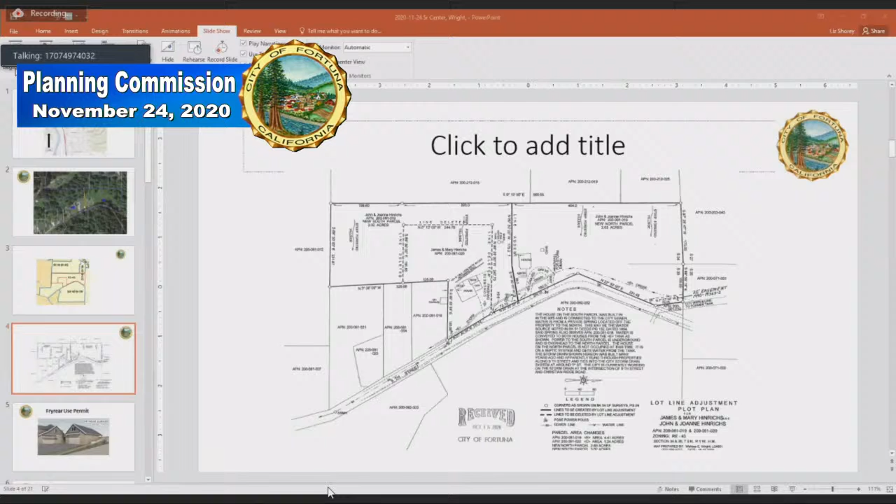That's one of the things that will be remedied. Parcel 2 has a single family residence, and the current side property line will just be straightened out, tidying up and making the two parcels more uniform and standard in shape, rather than having this one wrap around on three sides of the parcel.

The zoning is RE43. This is an image of the zoning map, and this is the site plan.

Here you can see the new line through the middle. The dashed line is the line to be deleted. We've got a house on each side with separate driveways on each side, and there is shared water from a tank.

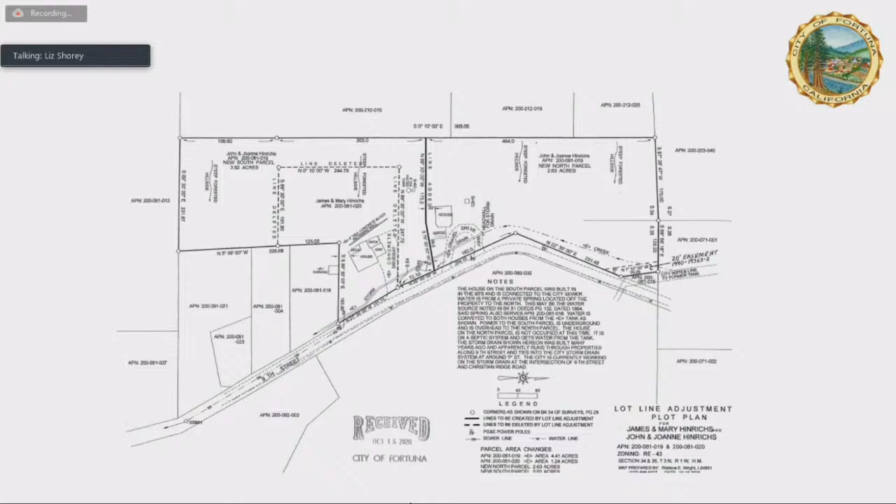Okay, thank you. I have a quick question. I'm looking on the satellite version, and in this picture on my phone, there's a small outbuilding that looks like it's right about where the lot line adjustment goes.

Yeah, let me share that again. There you go. So it's this shed here.

Yeah, it just looked to me like it was very close. It probably will be required to be removed, depending on the size of the shed. If it's smaller than 120 square feet, it does not need a permit, and the setback is reduced to 3 feet for a shed that's 120 square feet or smaller.

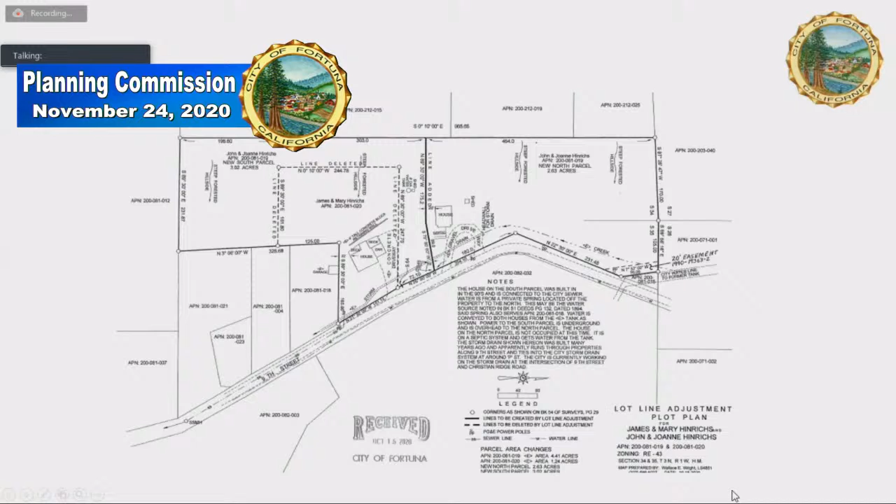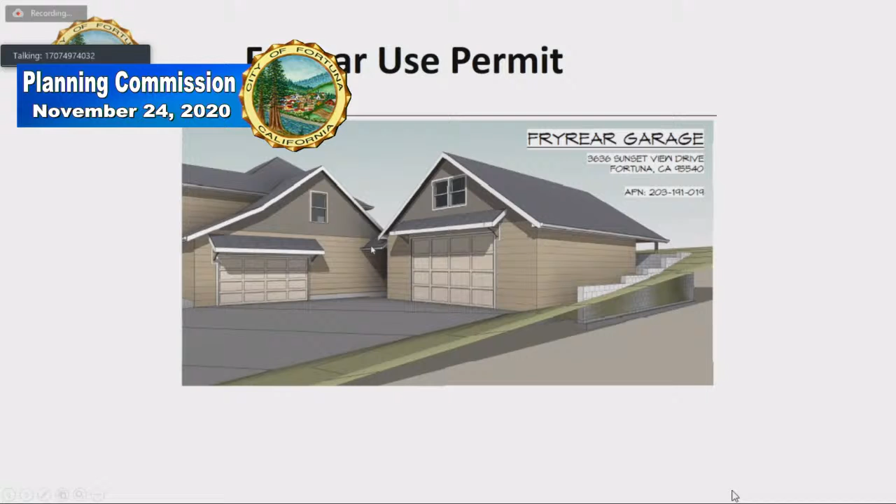Okay, so this is an image, a rendering of the main building to the left. That's an existing single-family home, and to the right is the proposed garage, but it's actually been constructed recently. This roof covering here would be the required breezeway that connects the two structures.

But the applicant was issued a building permit for the garage, and then during construction they decided they didn't want to connect the buildings. They didn't want the covered breezeway, and in that case it would become a detached garage and fall under the height limitation. So with the breezeway cover, it's allowed. Without it, it requires a use permit.

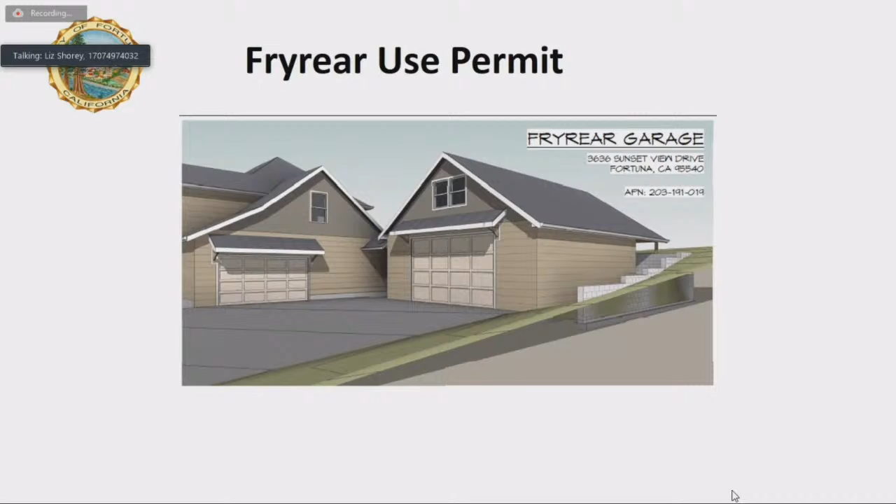Let's see, let me go over the location. It's in the southeast part of the city at the south end of Rohnerville Road, Sunset View Drive. It's an area of... let's see, this is, no, I'm sorry, it's 1 acre zoning, RE 43.

Here's the location here. Sunset View Drive, and then Forest Drive to the north. So it does have double street frontage. This is a little bit of a slope here.

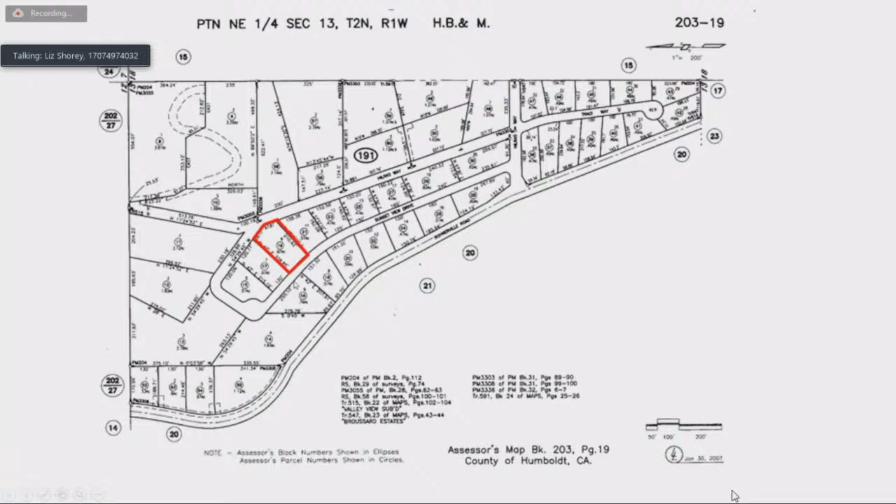And I think that because of the setback and because of other factors, there's not a visual or a negative impact from the height of the garage. We've got vegetation that kind of eases the impact of the height, and we've got the separation.

And also the garage is really designed in a manner that's very consistent with that neighborhood. So I think this neighborhood is really developed with large homes, large garages and generally tall buildings. And I think the design of this building is really nice.

And this is the elevation of the garage itself. You can see it's got a nice roof, it's got coverings, it's got some nice siding and then shingles in the gable area. It really fits in with the character of the neighborhood, and it matches the house. So I don't think it's going to stand out or be any kind of a negative visual feature.

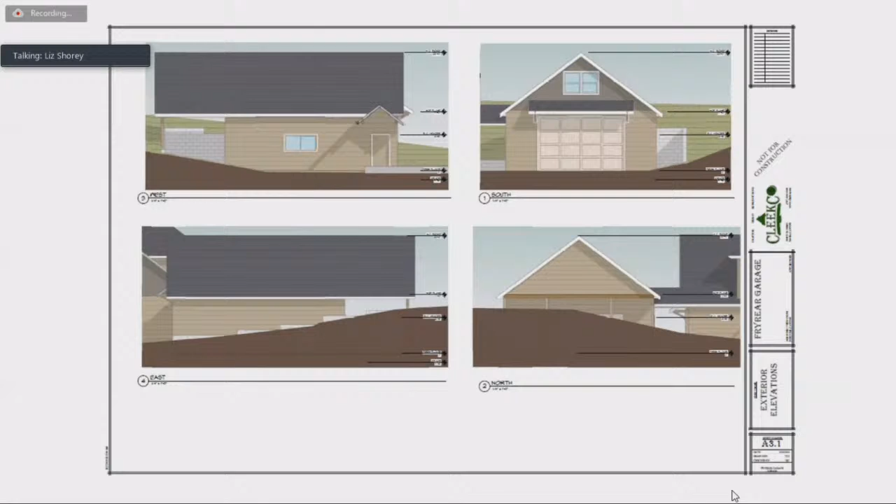And again, there it is together with the house. So staff recommends approval, and I'll hand that back to the Planning Commission for questions.

Okay, anybody have any questions for staff? Comments?

I'm idly curious on why they wanted to remove the breezeway. I mean, I see it as their prerogative anyway, but I don't know that they really specified that in that detailed of a manner. I think it's just something that came up during construction.

Thank you, Liz. There's one thing I'd like to add, and that is a letter of support for the project. It's from a neighbor, Jolyn Kotke. This is basically their public comment, and on Zoom we read these into the record, and it's short. She says, 'Hello, I'm writing today in support of the project proposed by Wally.'

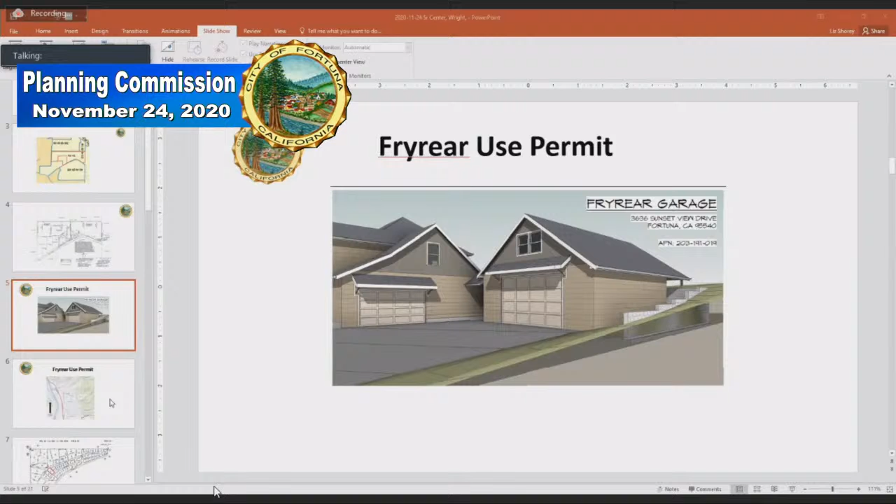Gulliksen has commercial on both corners, and then to the east is residential zone. You can see the residential development starting there to the east. And on the west side, we've got multifamily zoning, and we have Ambrosini School and single family elsewhere. There's also really a mix of commercial, single family, and multifamily in this area.

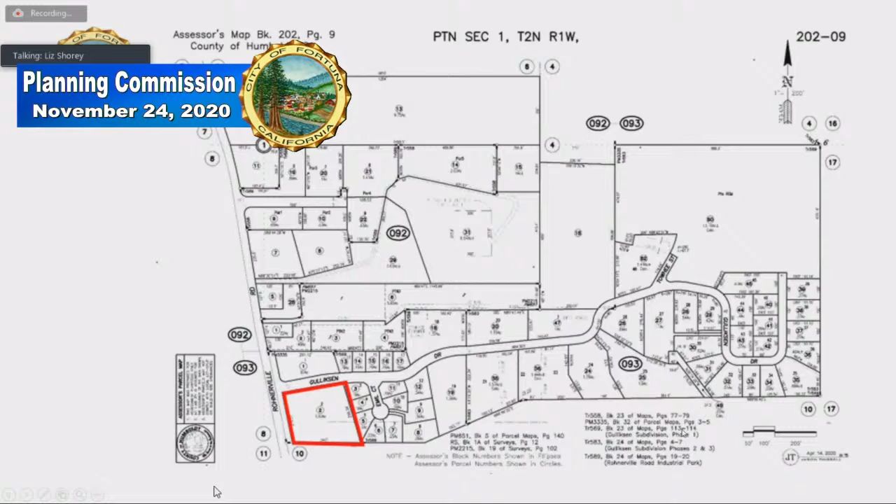But this parcel is zoned commercial thoroughfare. And there's the parcel map that kind of shows the overall parcel layout of the area. And then I wanted to show you the zoning.

So this is really an infill project on the vacant half of that parcel, kind of intended for the same type of development—more of an assembly or gathering place kind of facility, which is why the next project is a conditional use permit for this future senior center. So these two applications really go together, and they're being done in conjunction with each other.

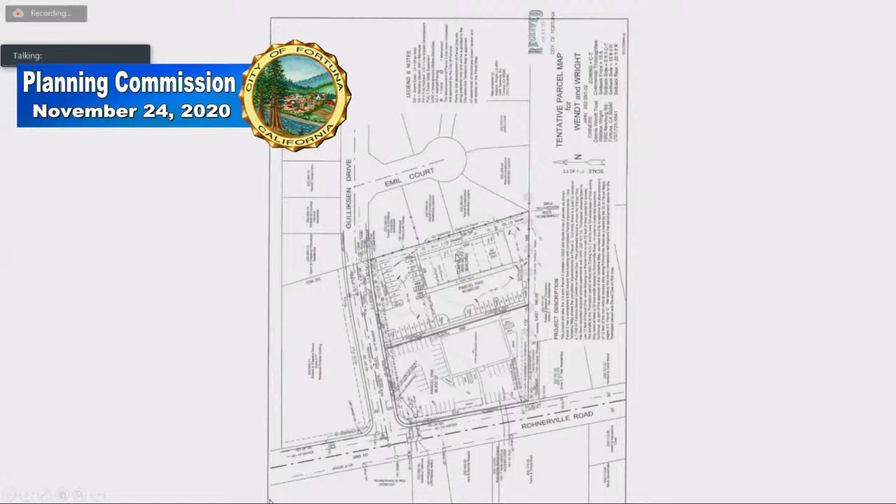Here we go. So this is Gulliksen Drive on the north side and Rohnerville Road on the west side, and this shows the preliminary site plan. It does meet the zoning code.

So this would have a driveway off of Gulliksen, and then you can see the shared driveway down below. Half of it would be on the senior center property, and the other half would be on the parcel to the south. And so this is the proposed building.

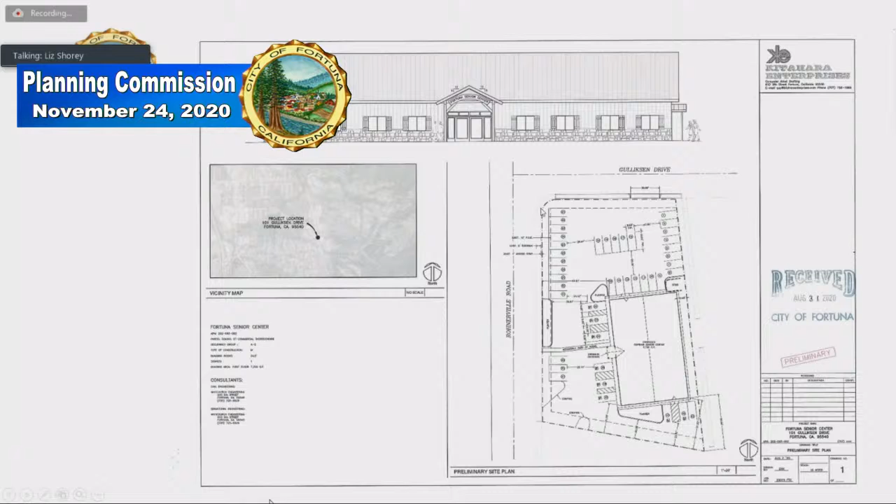And then we've got landscaping in the setback area. We've got a couple of landscaping locations within the parking lot. ADA parking all along the front. Looks like there are 6 spaces and then 3 in the back.

Attendees, for the most part, for the classes would be 40, 50 attendees, and then there would be an occasional special gathering. They have potlucks, and they play bingo I think once a month.

Hours of operation are typically Monday through Friday, 9 a.m. to 4 p.m. And the building could be rented out. They do not have any plans, or they've not discussed it at this point, so it's something that will be planned out in the future.

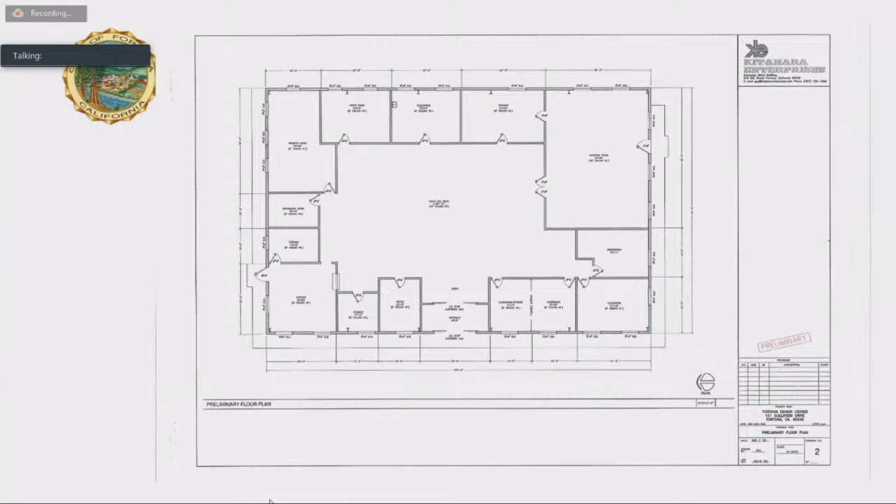Let's see. So let me see what else we've got here. These are the elevations.

They've got some side doors with coverings on them also, and windows on the north side for lighting. So I think they went in with the idea of having a nice design, and this is the building that is going to be presented, facing the public on Rohnerville Road.

And the building is not as tall. It's not quite as tall. Gary, the building official, looked at it and he said that the difference between this and the building to the east is that this will not have as much of a massive look, because the height is really in the peak of the roof. The walls are shorter.

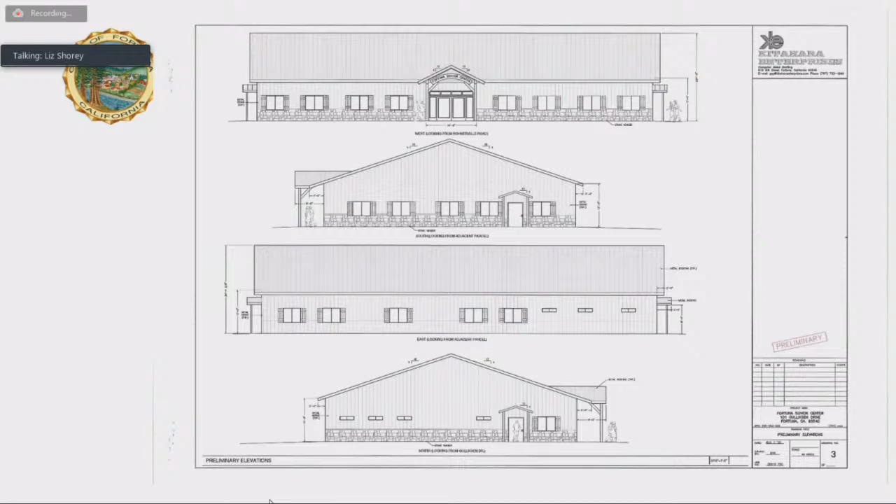And with that, I think I've covered everything I have. If you have any questions, I can answer those, and then we can turn it over to the applicants to answer any other questions. Okay, anybody from the planning commission have anything they want to bring up, talk about, ask questions about?

I did. This is Gina McClendon. I don't travel that route very often during the peak hours of school. And I was wondering, since the road construction has been completed there on Rohnerville Road, do we think there's going to be a big impact to traffic along there when you're adding 40 to 50 people going to classes in addition to all the school traffic that's normally there?

Yeah, I think the type of use and when they typically use it, and the volume of people, are going to be so much lower. The main thing is school traffic is earlier. They're typically going to operate from 9 to 4, but of course that can vary depending on the classes or the gatherings. There are larger gatherings, might be like a potluck at lunchtime, where there's not any impact on Rohnerville Road. The impacts on Rohnerville Road would typically be at 8 in the morning and then at 3 in the afternoon.

So, we really don't expect those to be the peak hour for the senior center, but we can talk to them about it when you're ready to open it up, just to confirm.

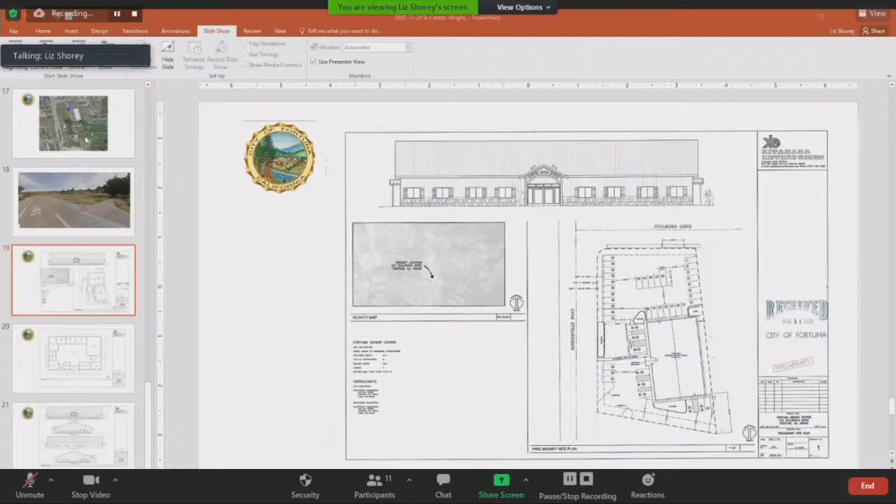There's one on the property, right on the frontage. So that's good. I'm not sure where the bus stop is. There's another one down towards the hospital, going that direction. Oh, okay, north, even further. Yeah, north, there's one going north, and then there's another one going, like you said, towards the loop.